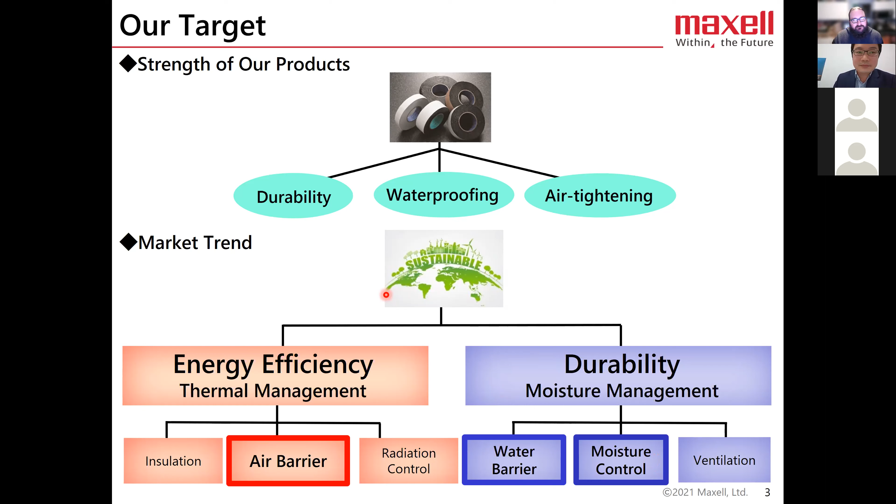I would like to talk about our products that are currently sold in the United States. Currently, we are selling exterior wall penetration pipe and wall sealer that seals the gap around the pipe penetration, and air sealing and flashing tape that seals the gap between wall fittings.

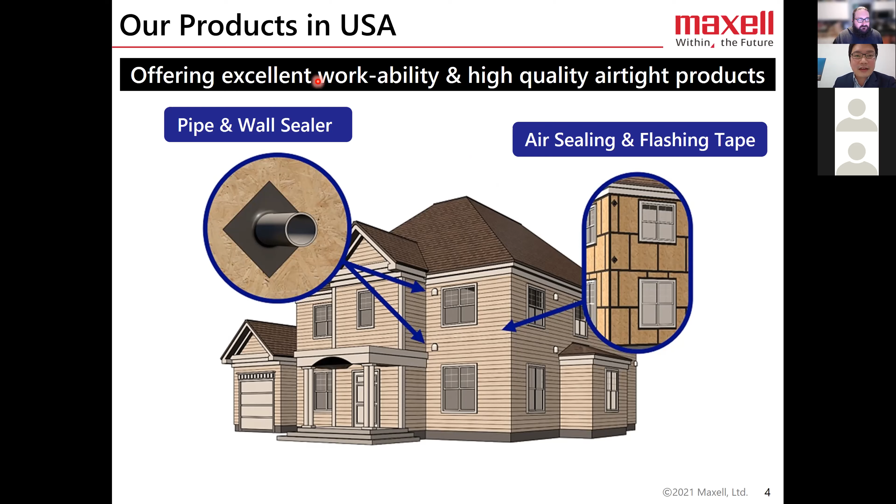As mentioned earlier, our products are high-quality tapes and self-adhesive, easy-to-use peel and stick grommets that have high air tightness, waterproofness, and high durability. In addition to these functions, another major feature of our product is excellent workability. Today, I will explain details about the pipe and wall sealer used around pipe penetrations.

Products commonly used today around pipe penetrations are spray foam, adhesive tape, and tape-on or nail-on grommets. All of these products have problems and are time-consuming work with large variation between workers on how they are installed. Therefore, we have developed a high-quality, easy-to-use product for air tightness around pipe penetrations.

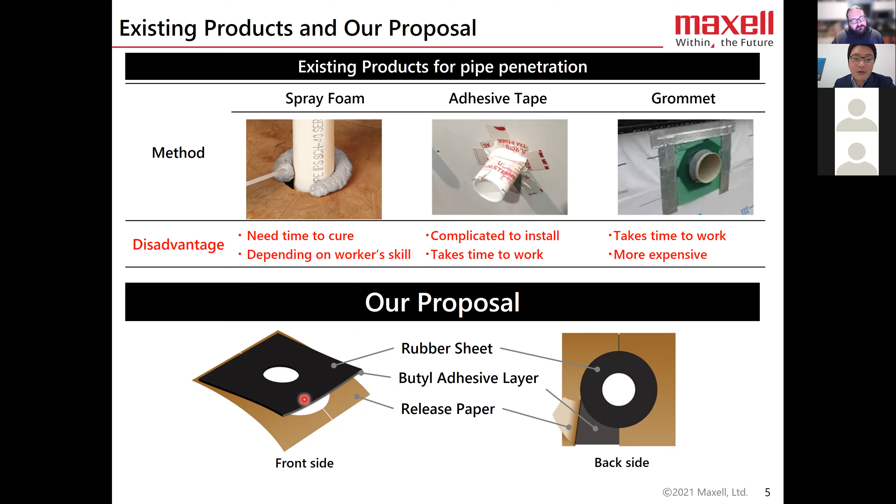The products we offer are shown at the bottom of the page, pipe and wall sealer. This is a sheet-type product in which a rubber sheet and butyl adhesive tape are integrated, and the hole is made in the center for the pipe to pass through. The construction method is very simple. Insert the grommet around the pipe all the way. Then peel off the release paper and stick it to the wall. It takes less than 30 seconds per pipe. Also, the finish is a perfect airtight seal.

The main point I'd like to make in this section is that our product helps keep labor costs down because it is a product that anyone can easily install. In addition, since there's only one way to install it, there is no construction variation between installers, so it is a product that can be used with confidence.

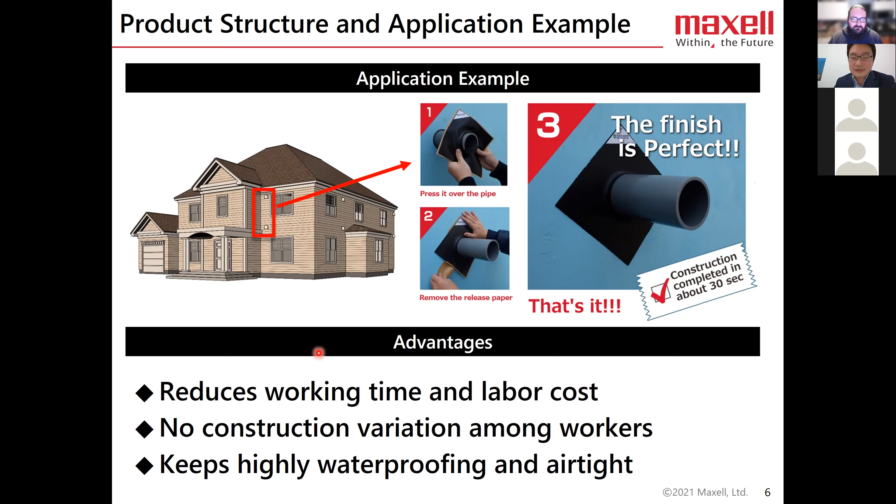Lastly, I'd like to talk about our quality. MAP system pipe and wall sealer complies with AAMA 711-13, which is required for airtight and waterproof tapes and grommets in the United States. Here we show the value of our self-adhesive strength, which is an index showing the ease of sticking to substrates. As shown here, it has a much higher value than the standard used in the United States. In addition, even after accelerated deterioration tests, the value did not decrease.

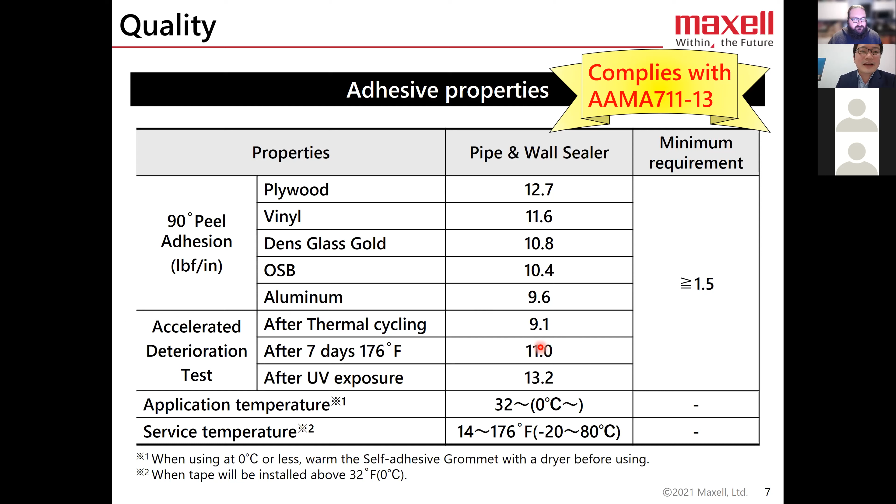From this result, it can be said that our MAP system self-adhesive pipe and wall grommet sealer and tapes are high quality and will last a long time. Before I finish, I'd like to point out the main points again. Our products are high quality, eco-friendly products for sustainable housing, have excellent workability, and will last a long time.

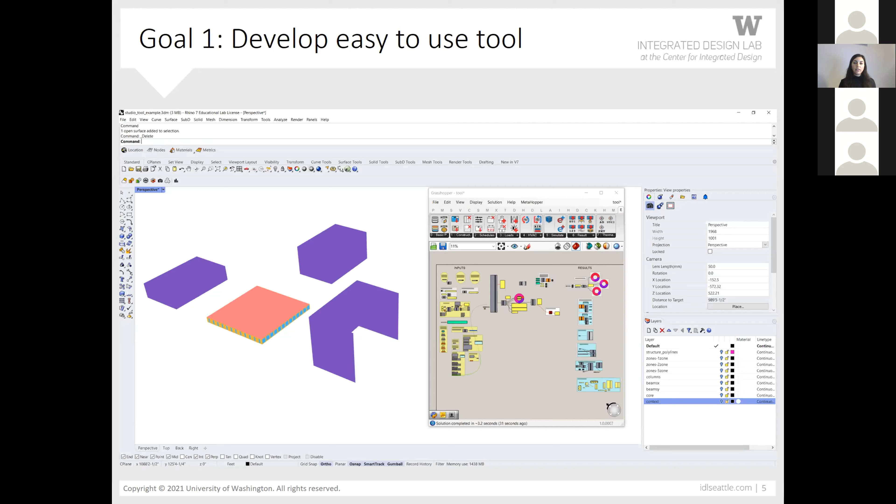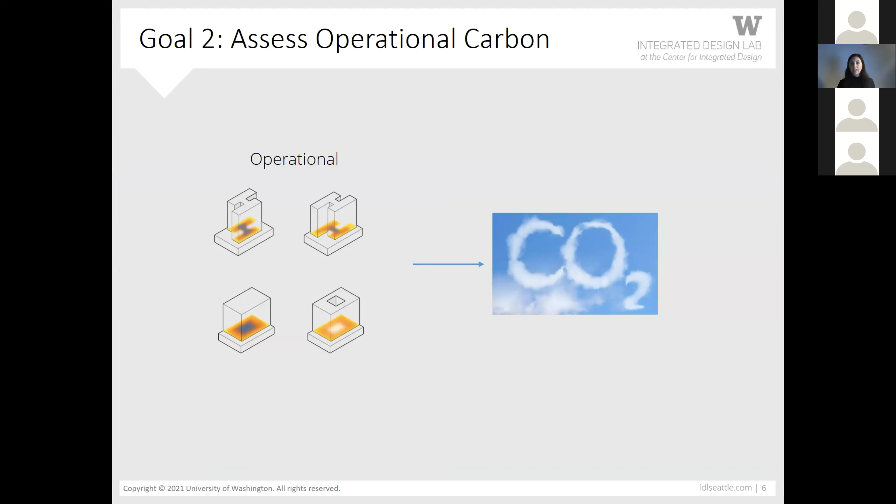So the second part of the tool was it really needed to assess operational carbon for their designs. So this is supposed to be super quick and easy for the students to use, just outlining zone geometries, put a few inputs, it packages an energy model, it runs it through EnergyPlus, and then it calculates CO2 emissions.

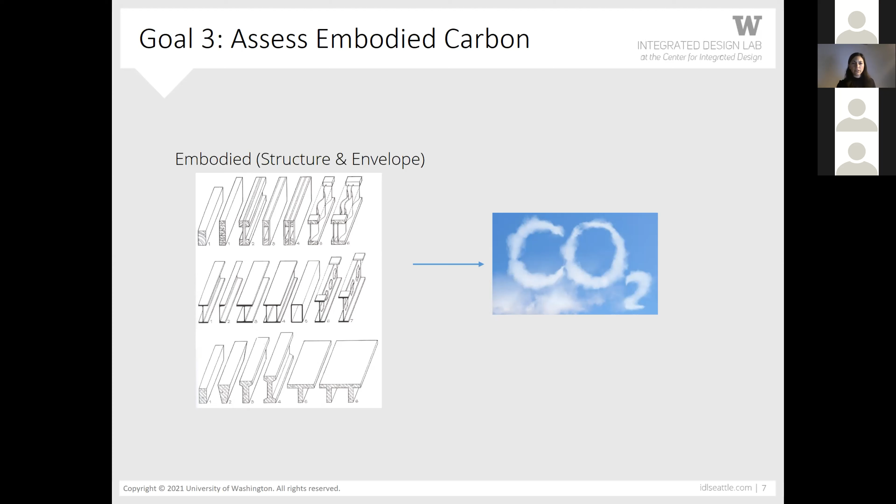And then the third goal, as I've mentioned, is assessing embodied carbon. And for the embodied carbon piece, we focused on the embodied carbon of the structure and the envelope of the design, because this is the primary contributor of embodied carbon of buildings. So we calculate the embodied carbon of the materials and calculate the CO2 emitted from the extraction of the raw materials to create the materials, the structure and the envelope, and the transportation. And I'll go into a little bit more about what measures we use for embodied carbon.

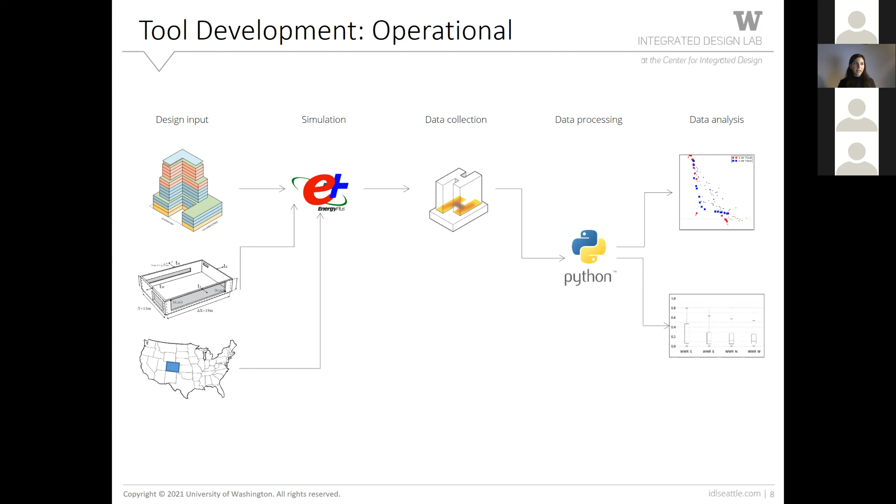So on a big scale, from the operational piece, we wanted to bring in design inputs, simple design inputs. We wanted to run an energy model through EnergyPlus. We wanted to package the results in a way that the students could easily digest and comprehend and disseminate the results. And similarly for the embodied piece, we take those same inputs, so the students don't have to give us any other inputs. It's all packaged in the same input.

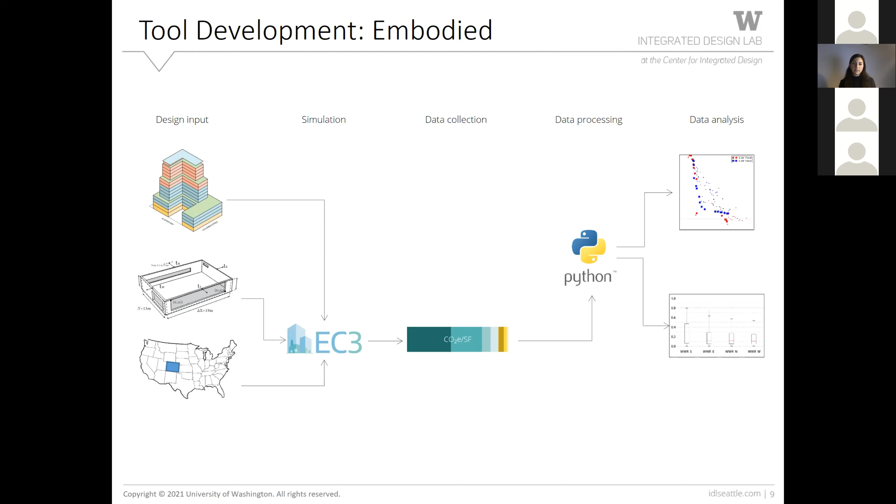And then it pulls from a database called the EC3 database. It stands for the Embodied Carbon in Construction Calculator database, which was developed by the Carbon Leadership Forum at the University of Washington, and it catalogs the embodied carbon of different materials. So we have the tool and we preset materials. We grab the materials from the EC3 database, and then we calculate the carbon emissions for that design and package the results and disseminate it to the students. So that was the goal for the whole tool.

A note about the embodied carbon data that we used, this EC3 database uses a cradle to gate methodology to calculate embodied carbon. So that means that it shares information for embodied carbon from the raw material supply, the manufacturing, and the production process of the materials. So we're basically calculating the carbon emissions associated with the production stage of the materials.

And we decided to host all of the material for this tool, all of the coding and the Rhino files, the Grasshopper files on GitHub. And this tool is accessible, it's open source, so anyone can go and download it if they're interested. So GitHub, it's basically a repository, it's similar to a Dropbox. And once students downloaded the files on their local machine, they can start to use it. And then as we updated throughout the studio itself, we discovered ways to improve the tool. So we would just push new versions to the students as they were working.

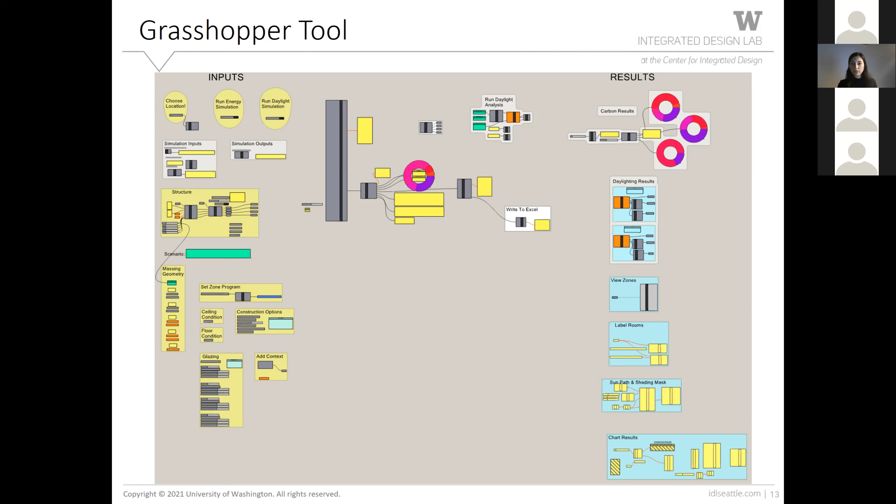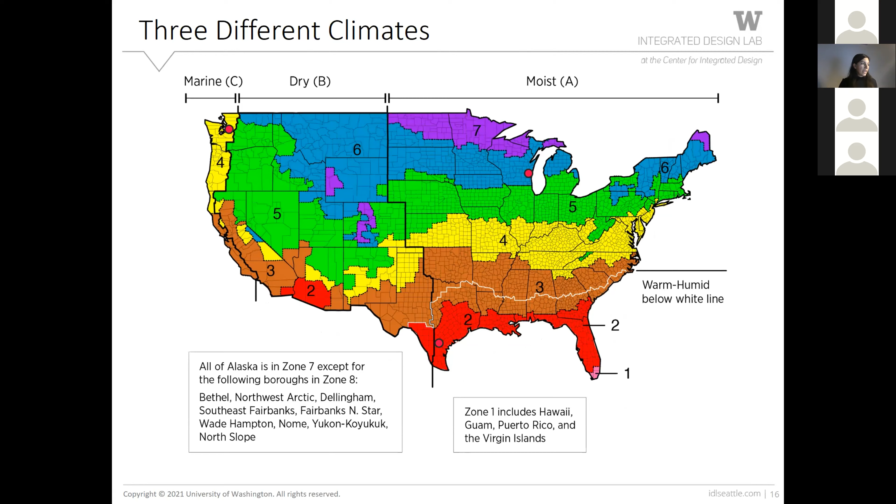So the first input that I want to talk about is the location. And the studio was set up to have 3 different studio sites, Seattle, Milwaukee, and San Antonio, in an effort to explore how climate and dirtiness of the grid impacts trade-offs between embodied carbon and operational energy. So we're looking at 3 different climates, type 4, type 6, and type 2. And we're also looking at 3 very different electric grids.

So when the tool runs the simulations, it assumes that the buildings are 100% electric. And then we converted the kilowatt hours of electricity used by the building design to grams of CO2 using the carbon intensity of the grid, and each location had a different carbon intensity. And basically carbon intensity is how much carbon the grid emits per kilowatt hour of electricity production. So Wisconsin is the dirtiest. It relies the most on coal. So that one had the most carbon emissions per kilowatt hour. Next was Texas, and Washington's pretty good because we have a lot of hydro. So the grid is cleaner.

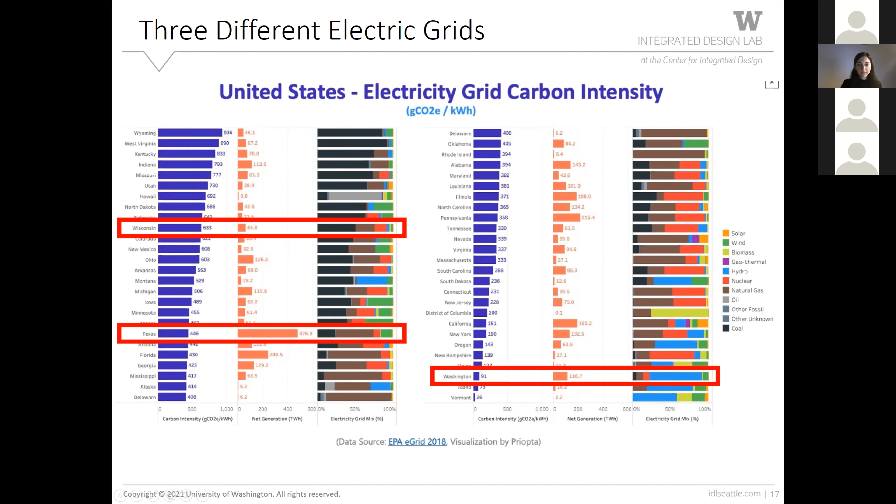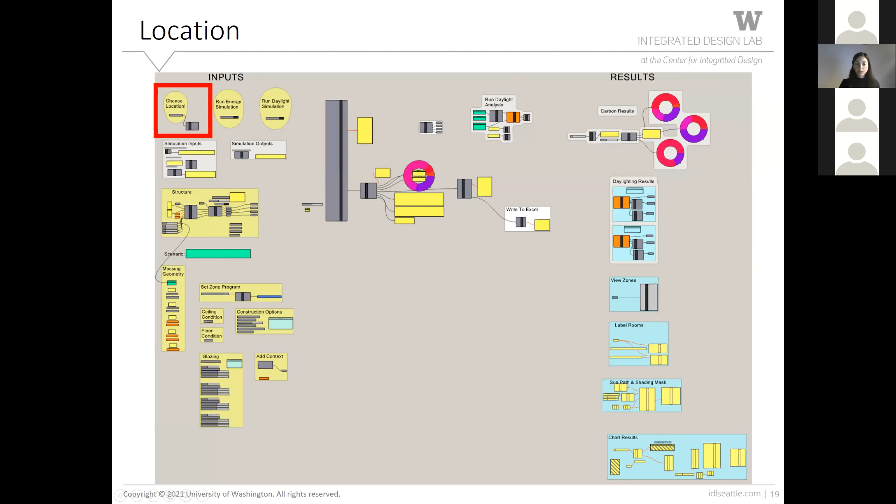So those are the 3 sites that we looked at. And the way that the students would choose the site is they go to this part of the tool in the Grasshopper script, and they simply choose a location with the dropdown. So from a user experience, they just choose this dropdown.

And then behind the scenes, we had a database of all the weather files, the TMY3 weather files that went to the energy model. We had the carbon intensity of the grid, and then we also had embodied carbon information for materials that was specific to a location. So the embodied carbon represents the manufacturing process that the materials are most likely to come from.

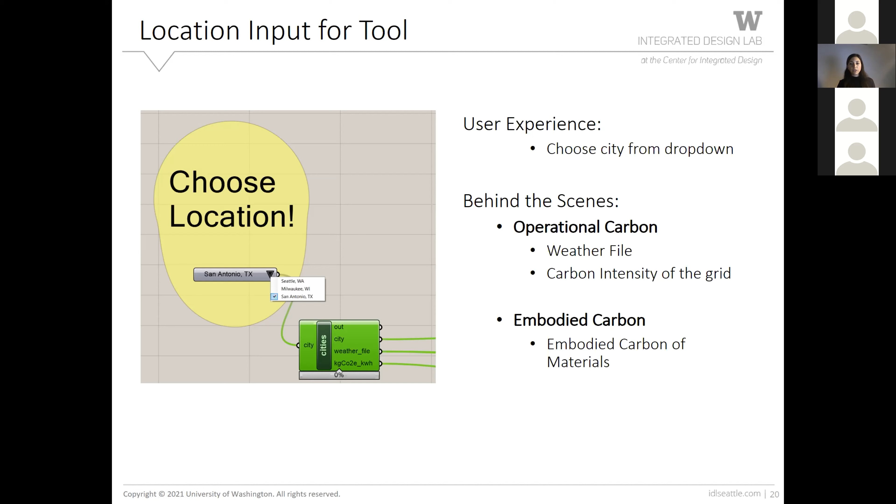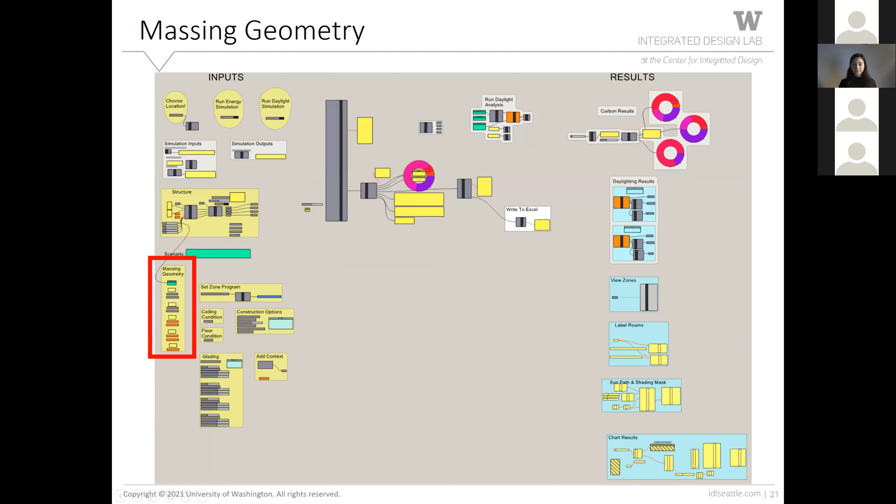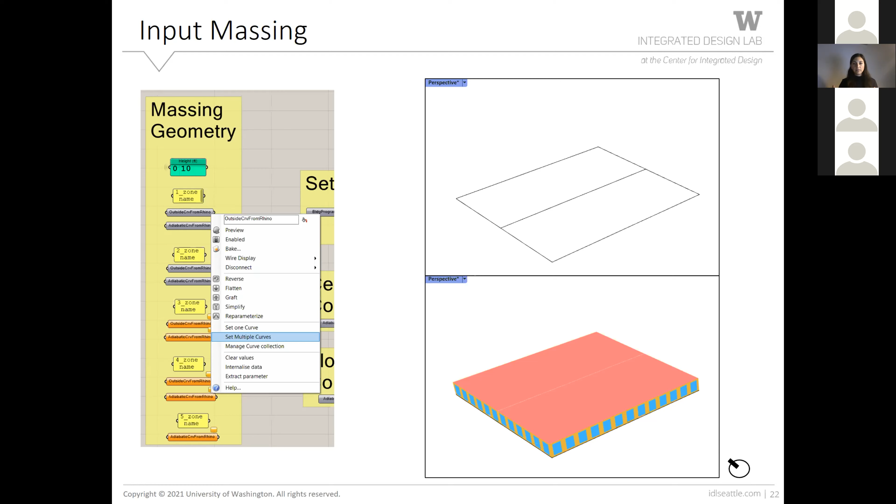One important thing to note is that this methodology that we created only gives embodied carbon and operational carbon information for 1 level. So if the levels were the same, they could just copy the information. If they change, then they would have to recalculate embodied and operational carbon for the design as it moves up and down the building.

So from a user experience to input the massing, they just choose the Rhino geometry. And that was really the only thing we used Rhino for. And then behind the scenes, it creates the energy model, and it also creates the area calculations for the facade and the slab.

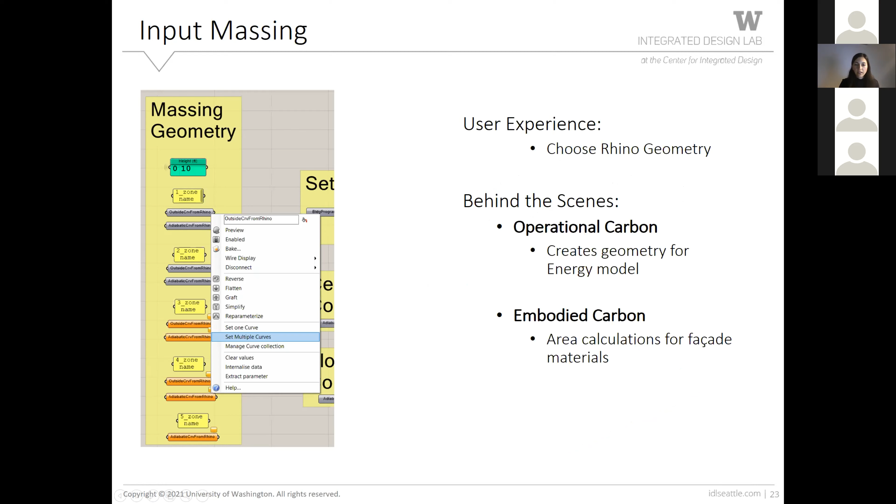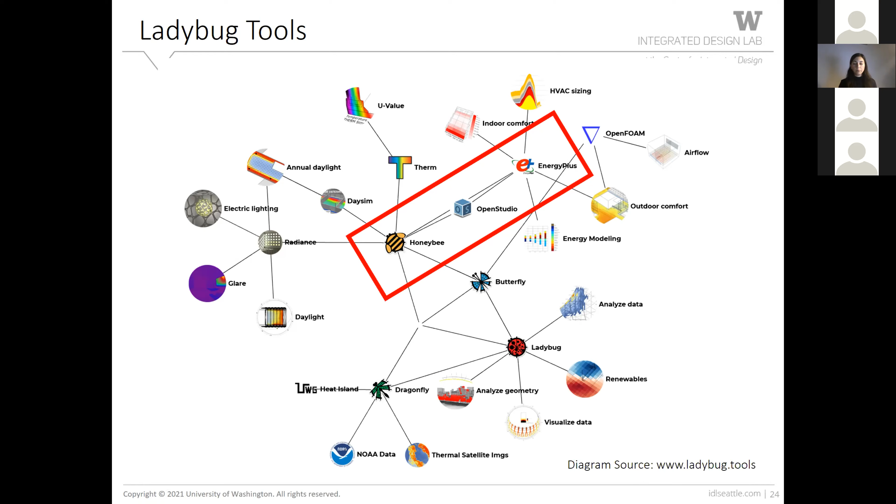And just to mention again, we used Ladybug tools to package the energy model. Those are those components, the open source components for Grasshopper. It created an OpenStudio model that was then run through EnergyPlus. And it was really important for us to use these tools because they are validated. EnergyPlus is created by the Department of Energy, and they're open source. So we just wanted it to be as accessible as possible, thinking about how people, maybe architects, could use it in the future.

Oh, there's a question, is a zone a room? It could be a room. It could be spaces that maybe have different programs, different heating and cooling requirements, or that are separated. And then I think the most important thing for the studio was that by separating the space, the entire floor plate basically, because we're basically modeling floor plates.

Separating the floor plates into zones allowed you to understand what the heating and cooling loads were doing throughout the day, because they would be different based on orientation, for instance. So it allowed you to kind of fine tune and understand what facade impacts were having on different areas of the floor plate.

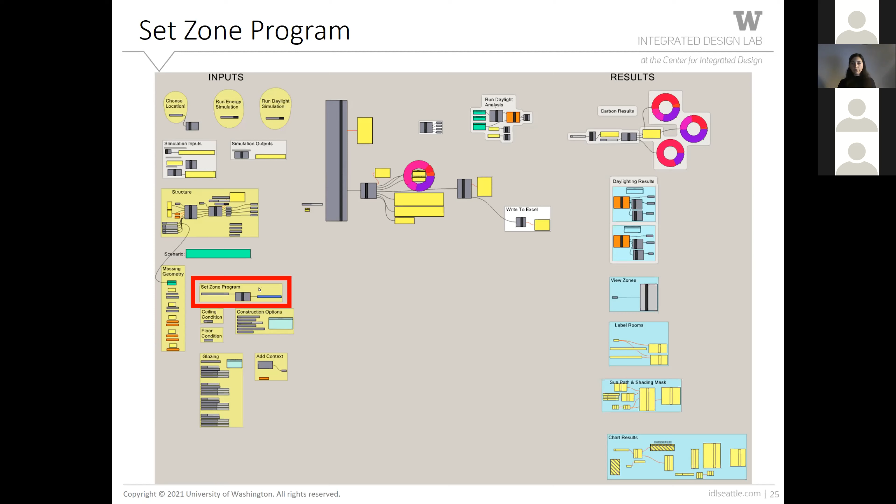Yeah, so we had 3 different zone program types, and we allowed the students to put in the 3 program types: retail, office, and residential. So the intent of the studio project was to create a mixed program building. And the way the students would input the zone program is from a drop-down menu.

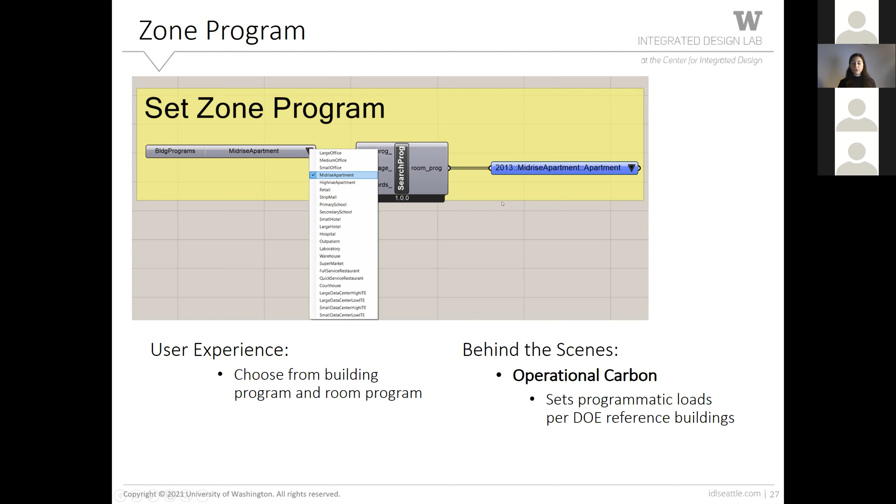These were Honeybee components that come from Ladybug Tools, the open source scripts that we were using. And the beauty of using those is that they pull programmatic loads from the Department of Energy reference buildings. So we didn't have to set things like the amount of people in the space and the schedule and the lighting and the electrical equipment. All of these things were referenced from Department of Energy reference buildings using this Honeybee script.

So in terms of all of these types of assumptions, the students did not have access to change any of this. They didn't have access to change the infiltration rate, for instance, which would have a huge impact on operational energy, how tight the building envelope is. So there definitely were a lot of limitations, but we just wanted to give them a quick way to assess basically building massing, window to wall ratio, and building envelope wall assemblies. That's the thing that the tool really focuses on.

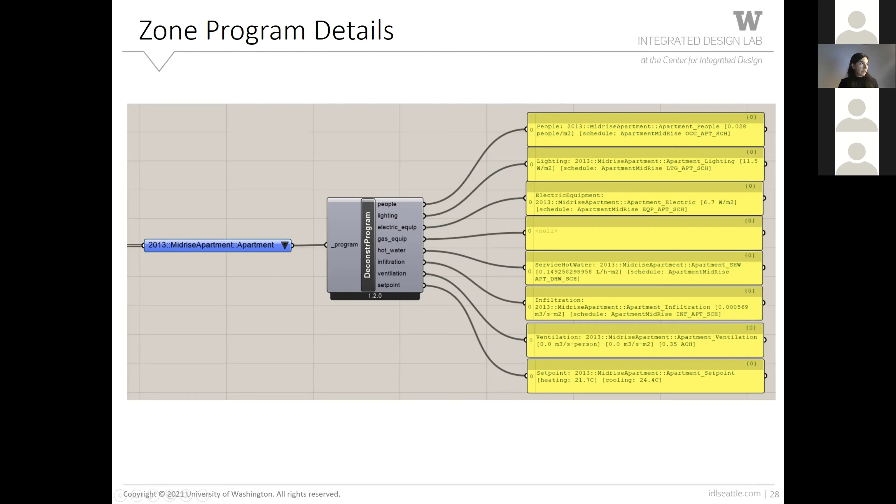So that's how the students would choose the program type. And then we also allowed for inputs on the ceiling and floor condition. Since they are just modeling floor plates, they could tell the tool if the ceiling was outdoors or adiabatic. Adiabatic meaning that there's no heat transfer between inside the zone and outside, so meaning that it's up against interior space.

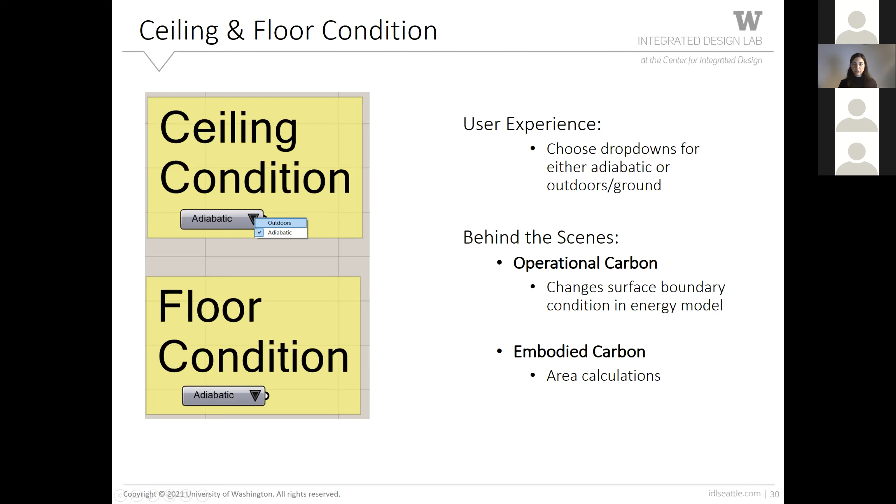And then the floor condition could be adiabatic or ground. And then this would change the energy model and change the embodied carbon calculations. And then we have the wall construction options. So we allowed the students to choose from different facade cladding types to assess the embodied and operational pros and cons of that decision.

The exterior insulation type and thickness, the interior insulation type, the wall framing, and interior finish. So once again, this would change the wall construction of the energy model, and then it would also pull from a database that we created and calculate embodied carbon calculations.

And at the beginning of the studio, the students were limited to these decisions, but as the studio progressed, we did change the tool for some students who really wanted to look at the impacts of specific materials. So we added materials to our database and allowed them to customize it a little bit.

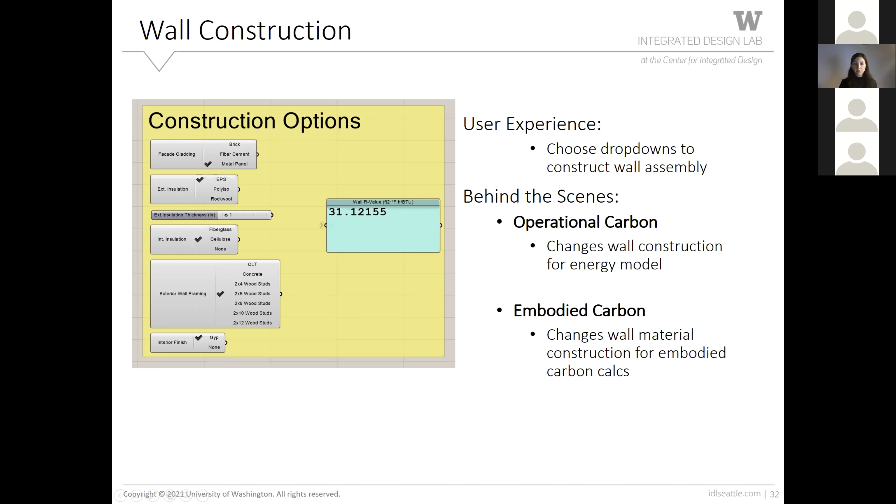And we also allowed the students to change glazing parameters. And those parameters were the frame type, aluminum or wood, and double or triple glazing. The window to wall ratios of each facade, north, south, east, and west. And if the building footprint had more than one facade facing in each direction, that window to wall ratio would be applied to multiple facades.

So if you had like an L-shaped building with 2 facades facing south, the south window to wall ratio would be applied to both south facades. You could choose between low or high solar heat gain coefficient and also different shading depths. And all of this went into the operational carbon energy model and also into the embodied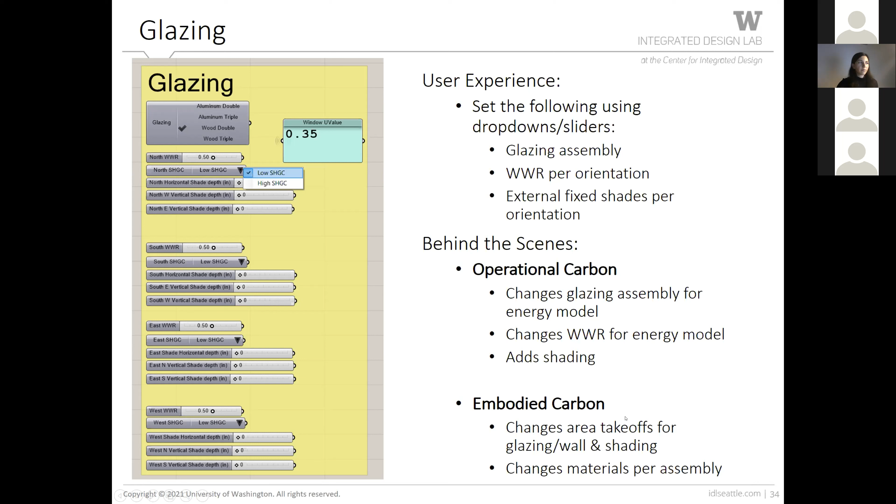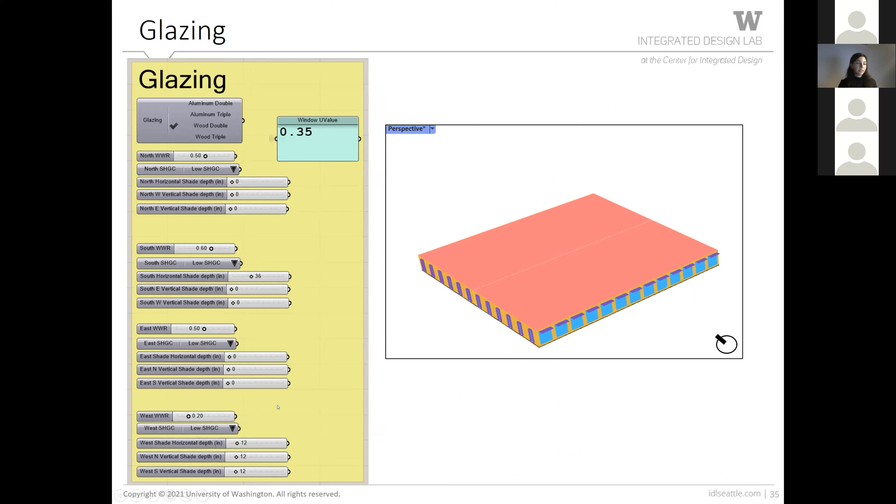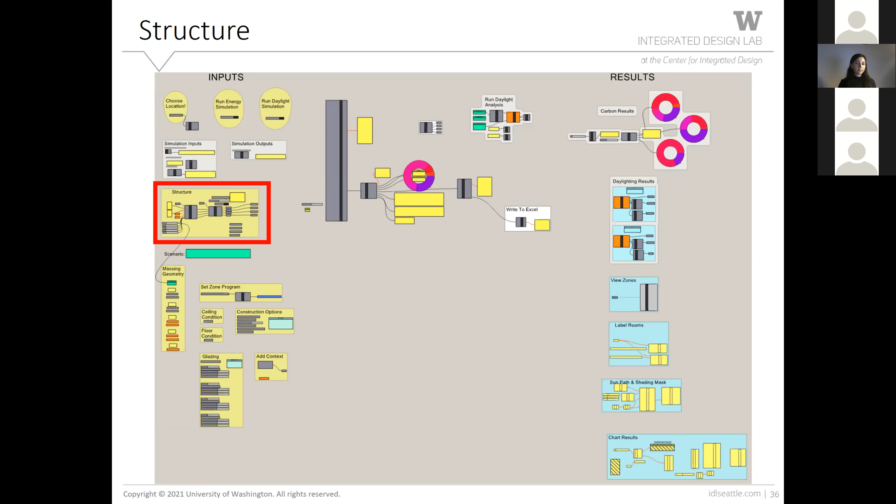And lastly, we also allowed the students to calculate the embodied carbon of the structure. And the students had two different ways to input the structure. They could either draw out this structural grid, and we were assuming that this was all mass timber, a CLT building. So they could draw out the columns and the beams in Rhino and a core, and they could bring that geometry into the Grasshopper script. And this was only used for the embodied carbon calculations.

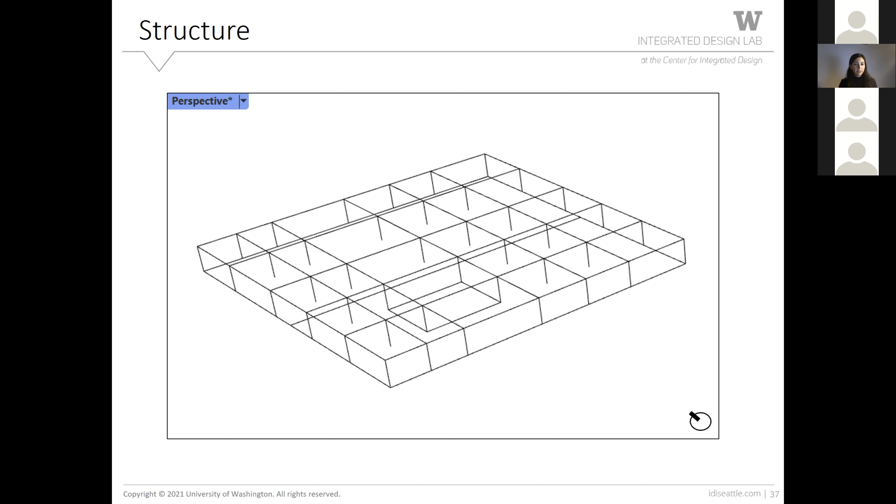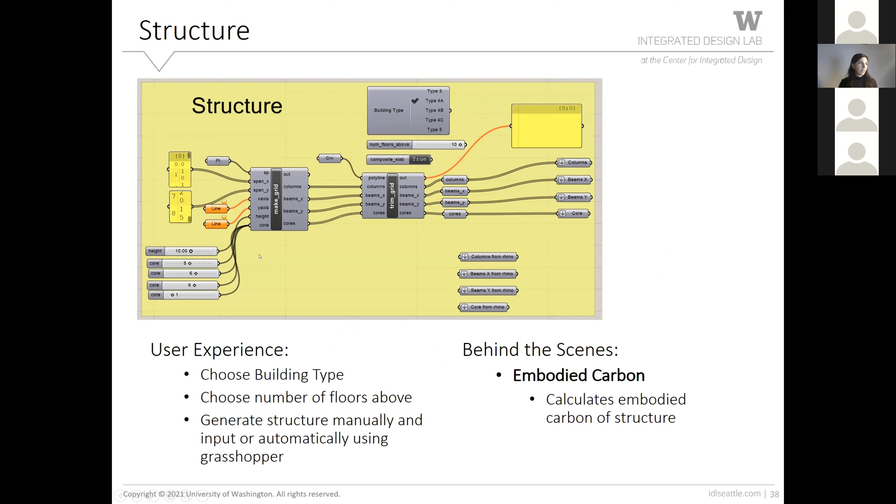Or they could manually tell the script what they wanted their bay spacing to be and what bay they wanted their core to be in, and it would create a manual or an automatic structure for them. And this was used for the embodied carbon calculations.

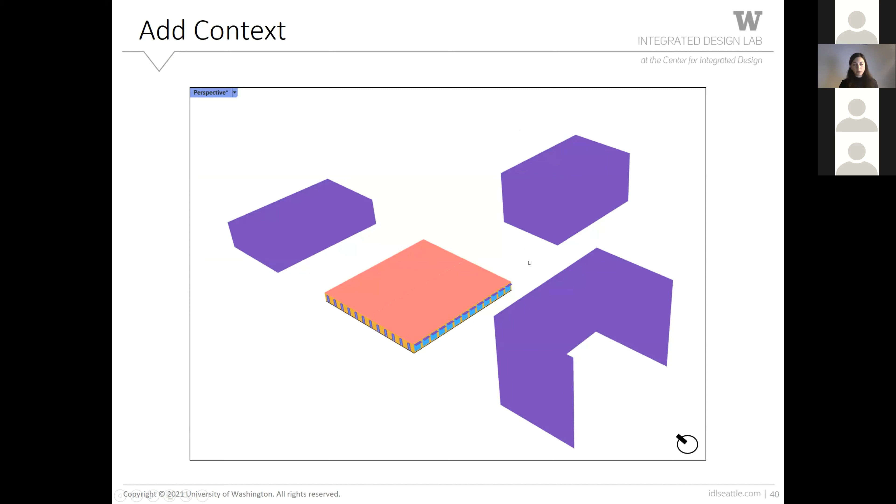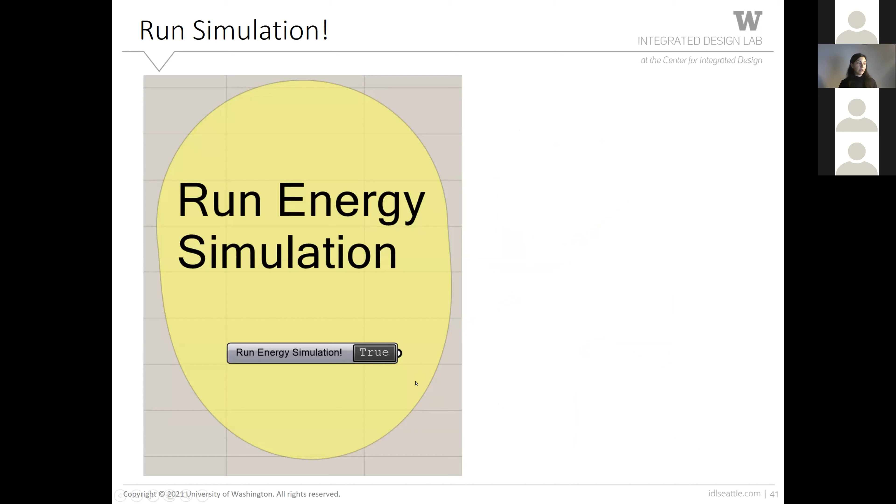So once the students input all of those inputs into Grasshopper, there's a part of the script where there's a toggle, and they just had to click it to true. And then the energy calculation would start running. That was a good sign that everything was working well. And then the energy calculation took about 20 seconds. It's super fast. And then they would start to get some outputs.

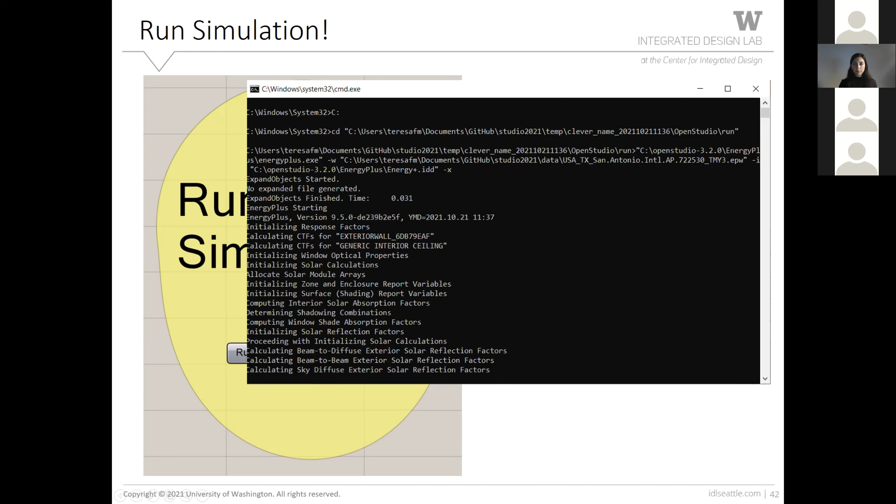One of the outputs that we generated were Excel spreadsheets. And with each iteration that they ran, they would have a separate Excel spreadsheet, and it was given a name. It was the date and time that they ran the calculation, so they could keep track. And they could also name the iteration, so they could also understand what iteration they were looking at.

And then it had a lot of information. It gave you the inputs, the height, the wall assembly R value, the U value, all of the glazing parameters that the students chose. And then it also had the embodied carbon calculations, the total floor area of the different zones, and then the facade areas of the different zones.

And then it gave the EUI, the kBTUs per square foot per year for the different energy uses. So we had cooling, heating, lighting, equipment, hot water. One thing to note is that we ran ideal air load calculations. So these values don't have a COP associated with them.

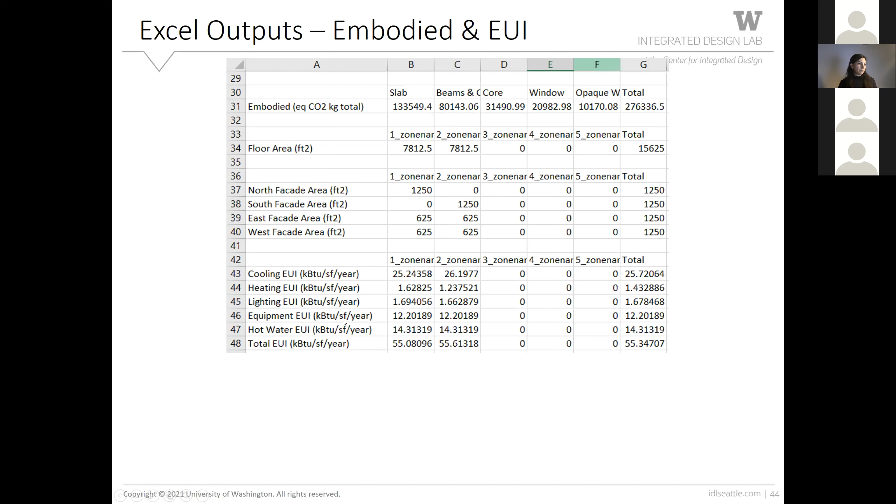And then from that, we calculated total kBTUs per year, converted that into kilowatt hours, and then used the carbon intensity of the grid, the relationship between kilowatt hours and CO2 emissions based on how dirty the grid is. We used that to calculate total kilograms of CO2.

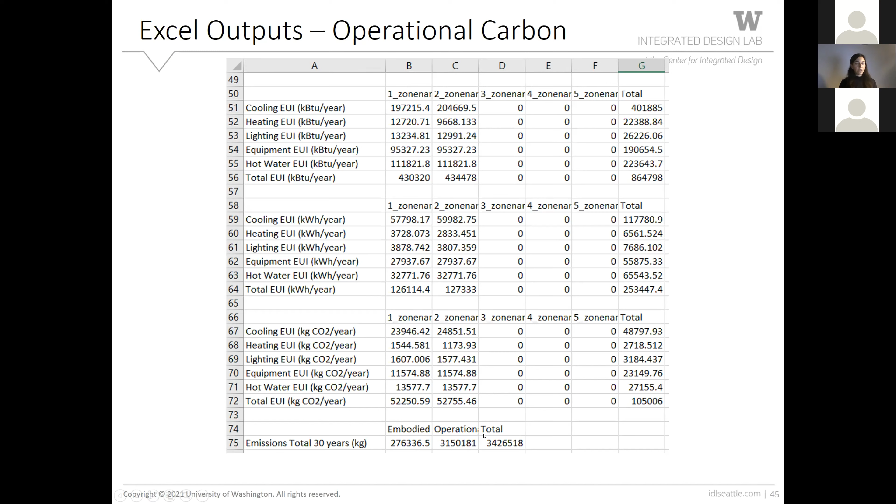And then we also told them their embodied CO2. And then this value shows the kilograms of CO2 per year. We also calculated it for 30 years to show, like, over a 30-year life cycle, how the two values compare. And that was what they had in their Excel spreadsheets. And then they also had these Grasshopper pie charts that were generated.

After each simulation, they could quickly visualize, for the embodied carbon piece, how much is the slab contributing? How much is the window, the beams and columns, core, and opaque wall? And then for the operational piece, how much the cooling equipment, heating, hot water, and lighting. This little piece is lighting. It's so small that the label isn't there. How much that was all contributing to the total operational energy and carbon.

And then there was a comparison between embodied and operational carbon. And they had a slider and they could put it out to 30 years to kind of get a sense of the relative impact of both.

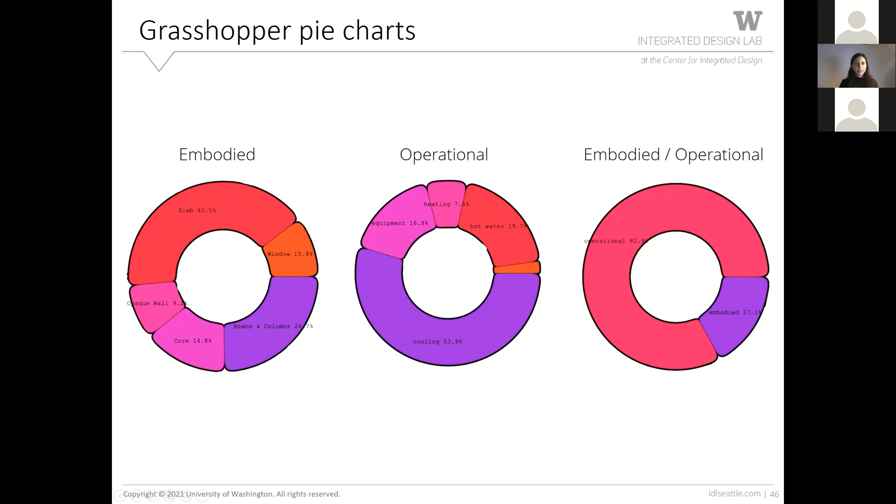Other things that the tool allowed them to do was they could generate sun path diagrams to understand shading opportunities, especially in San Antonio. This was something that the students took advantage of. And it basically would show the sun paths throughout the entire year. This is showing on a typical day in June, if you're standing at this facade, looking up where the sun

would be coming from. So you could see that the ceiling covers, at least from this vantage point, a lot of the sun. And then this building blocks a little bit of the sun in December. So you're gonna have sun coming in to that vantage point during this time of year. And this was helpful information for some of the students.

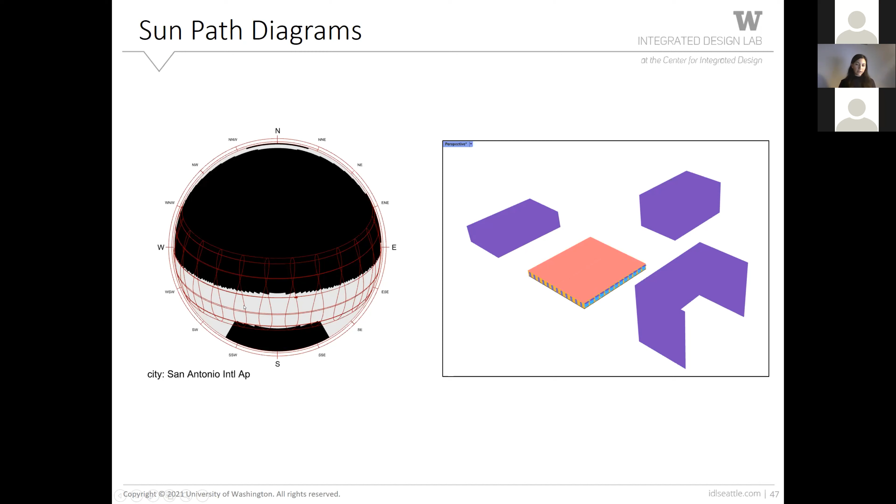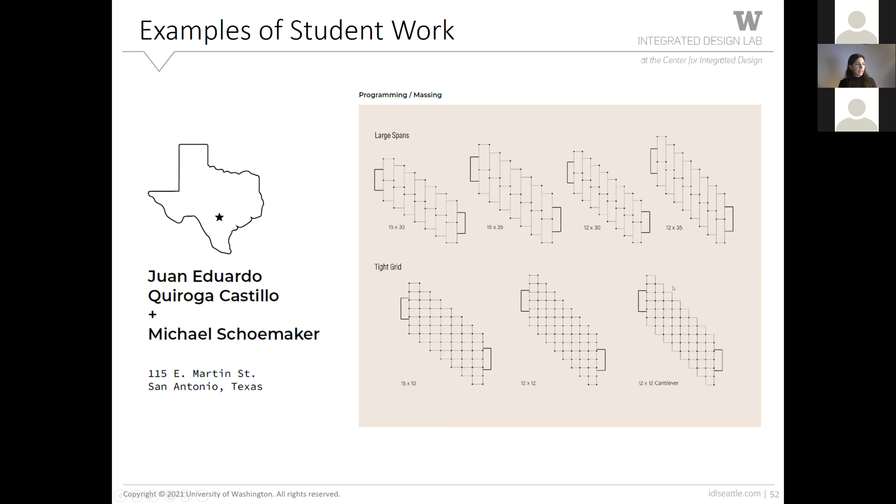They were also playing with shading. So they were investigating how much shade depth is optimal, and how much shade depth would optimize operational and embodied together. And this shows the progression of their design, creating these bays and then shifting them and adding shading by creating those balconies. And that led to a huge reduction in energy, a 10% reduction in EUI, and they determined that through the tool.

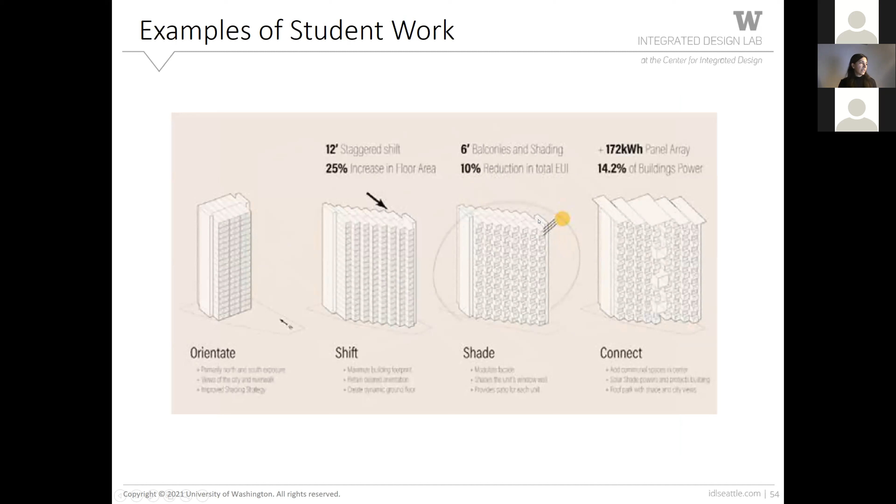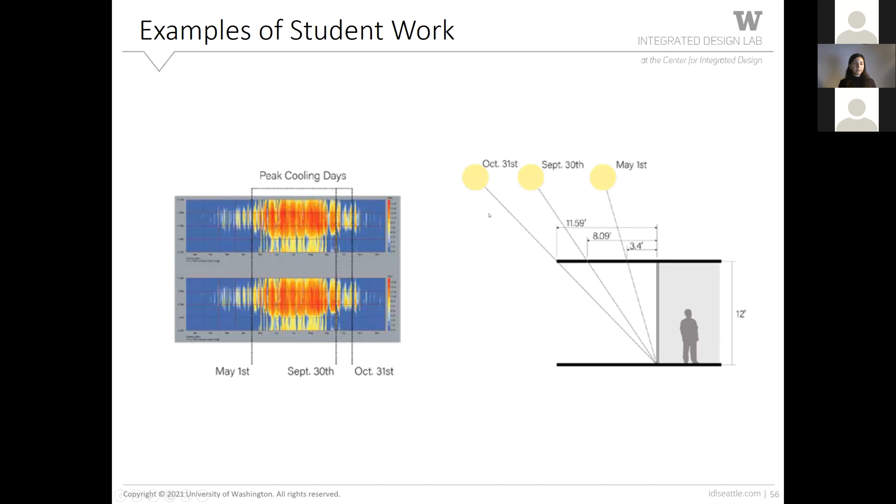They also did an in-depth analysis of exterior shading. So they looked at when are the peak cooling days, and then tried to determine what would be the optimal length, as a starting point, for the balconies that would shade during the hottest days where you would need the most cooling. And then using that as a starting point, they ran a whole bunch of simulations plotting the embodied versus operational carbon of all of those design variables that I just listed. And I think their optimal result was a 12 by 12 grid with an 80% window to wall ratio with a cantilever.

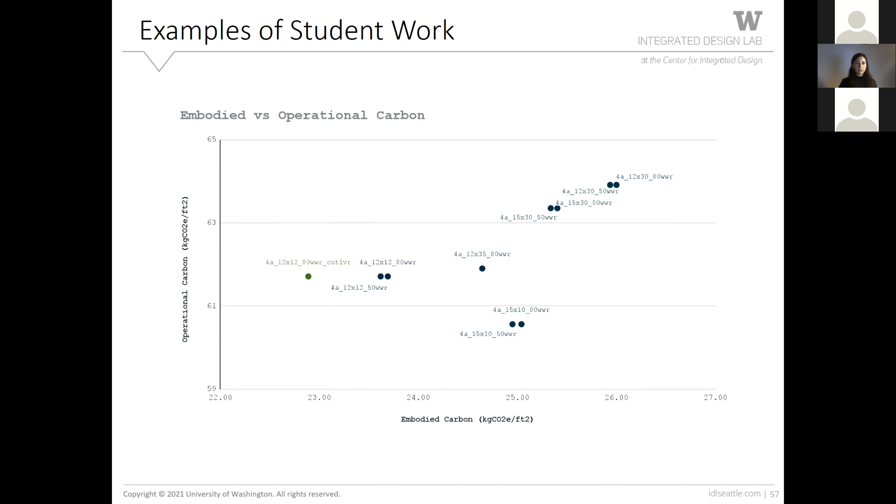And of course, they were also considering a lot of other variables. They were designing a building. This is a very pixelated image, but the embodied carbon and operational carbon explorations were used as a guide to help them make decisions, but it wasn't the only thing that they used. They had to think about the site, how the spaces were designed, a whole bunch of things. And I think that was one thing that was sometimes challenging for the students, how to use all of the information that the tool was generating to make decisions. And I think this team did a really good job because they started with some assumptions about their design and used the tool to ask questions, to tweak it and optimize it.

So I just wanted to touch briefly on some research we have been doing that has been expanding this tool development for the studio. It's a paper that we're working on, Tomas, Chris and I, and it's called On the Trade-offs Between Embodied and Operational Carbon in Building Envelope Design: The Impact of Local Climates, Energy Grids, and Supply Chains. And basically we're using the studio tool.

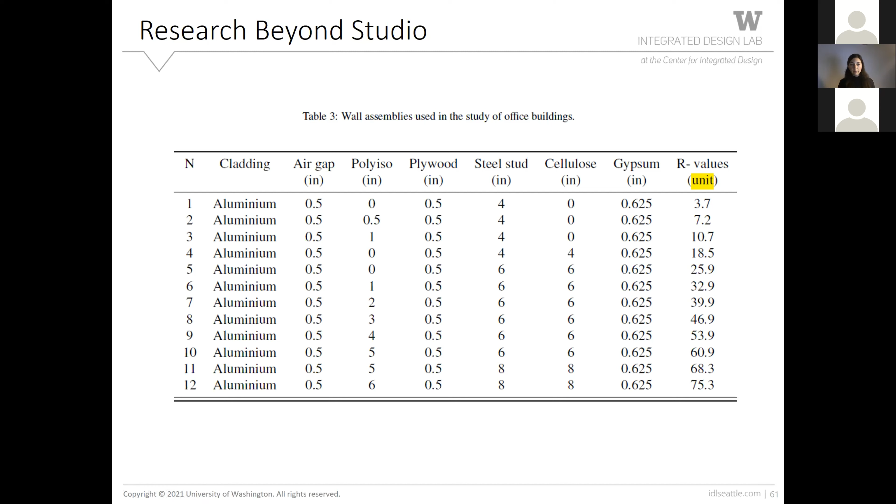Just to give you an idea of what type of things we're looking at, these are the 12 different assemblies that we looked at. We varied the thickness, the exterior insulation thickness, and then the amount of interior insulation to get different R values to understand the relationship between changing the wall type on operational carbon and embodied carbon.

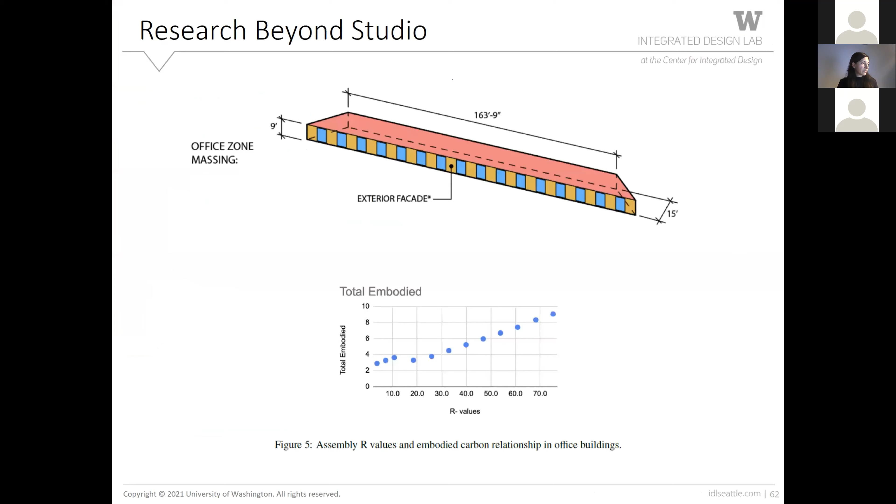And then it would also be a matter of adding information for the embodied carbon in our database for that particular location. So it isn't too hard. We included some additional cities in this paper, and it didn't take too long to add.

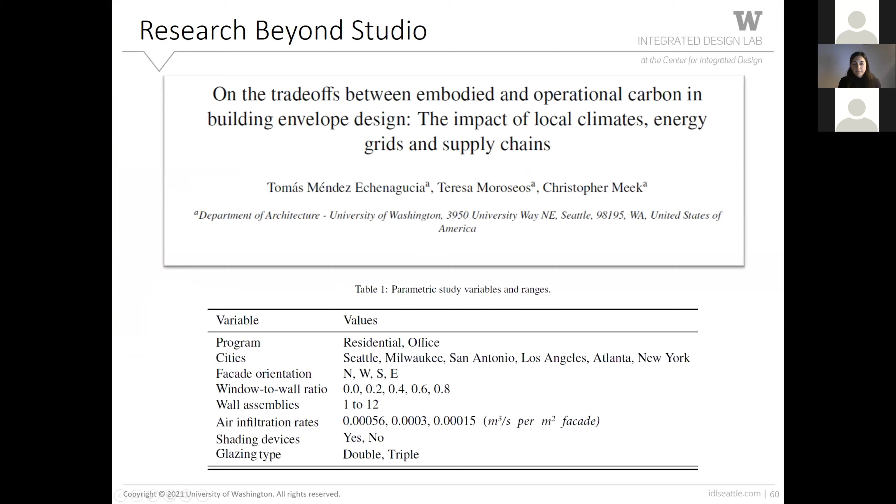So the tool is kind of constrained by the studio environment because you had specific cities and kind of specific uses. So there are kind of pieces to be added to add a school use or something else like that. Yeah, it was really constrained, and we spent a lot of time. One of the reasons it was so constrained is we wanted to gather the design results, the operational and embodied results, for all of the students.

And in order to do that, we kind of had to constrain the inputs to make sure that the outputs were all consistent. We did allow the students later on to be able to customize their Grasshopper tools, and we worked independently with them to do that. But yeah, just because we were trying to make it as applicable to everyone, I think it did limit the capabilities of the tool itself.

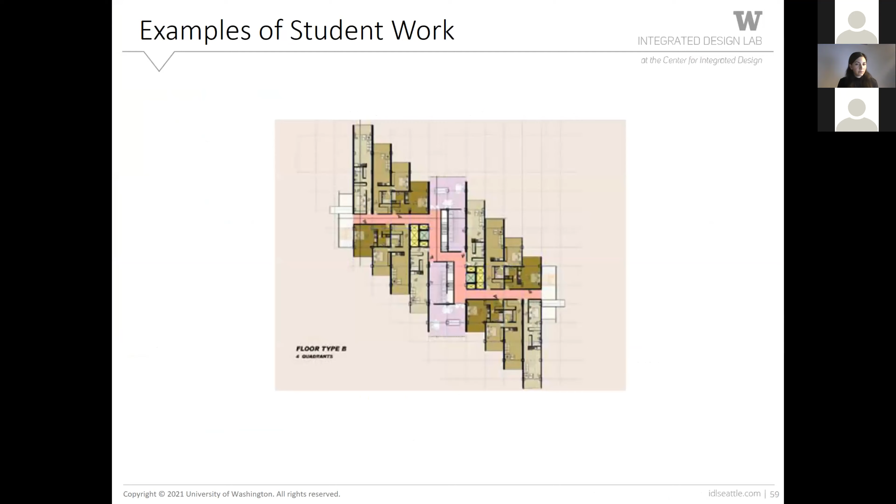I think because of the mild climate, the embodied investment just didn't have to be that much. Like you didn't need as much insulation, or you didn't need exterior shading as much as some of the other cities needed. So I think the students found that, and when they reported these to us, they probably had already discovered that they could scale back a little bit. But in places like San Antonio and Milwaukee, they needed a bigger investment in embodied carbon because of the climate, I think.

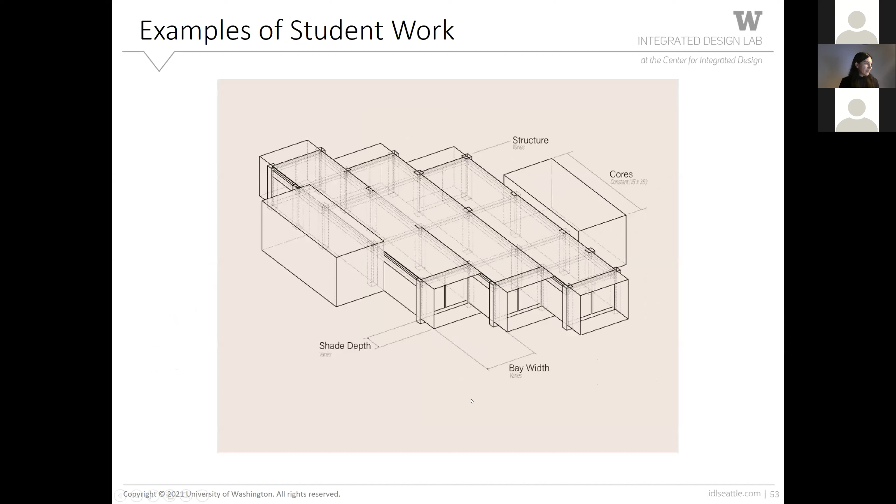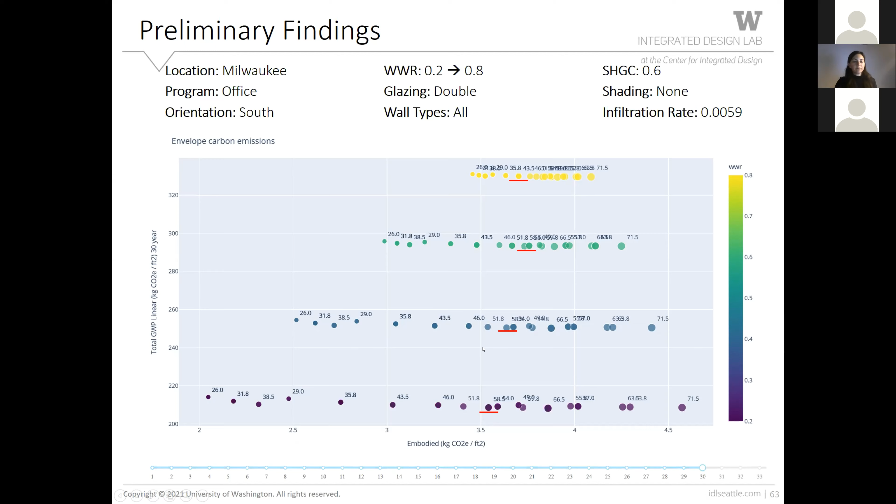Because you'd sort of expect to see a line going down from right to left, right? Or am I misinterpreting that? Oh, like you would expect to see something like this. Yeah, that's a really good point. I think what this is showing, and I think our other results are showing this too, like these results are showing it too, that the relative impact of embodied carbon seems to not be making as much of a difference on operational.

But one thing, if we zoomed in here, we might be seeing a little bit of a trend. It doesn't really seem like it though. I think that's a really good point. I need to look into that more. Yeah. I assume it wasn't a large sample, right? I mean, yeah, it's not a large sample. That's a good point. And I guess this data is kind of hard to interpret because

one thing that's not staying consistent is the massing. So it's kind of hard, honestly, to compare all of the studio projects together because there are so many variables that are changing. If we just looked at one particular group, we might be seeing that trend where as you increase embodied, operational decreases. But yeah, I think that's a really good point. I think that's something that we should dive into.

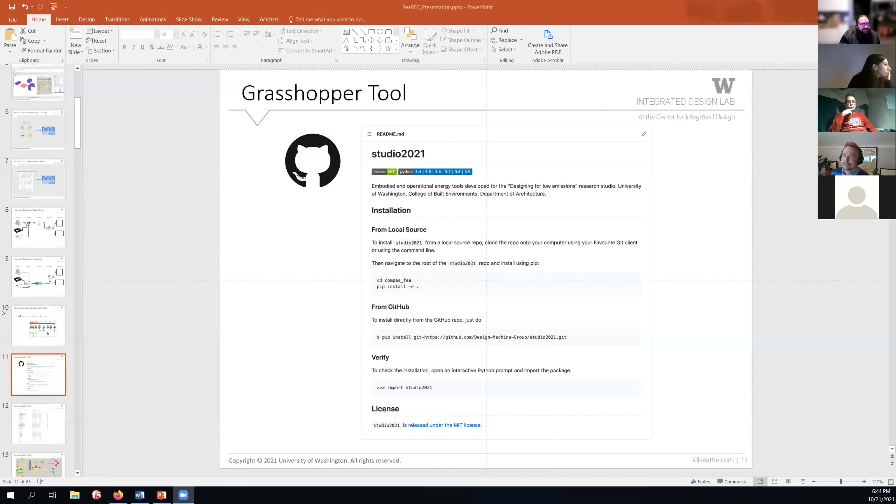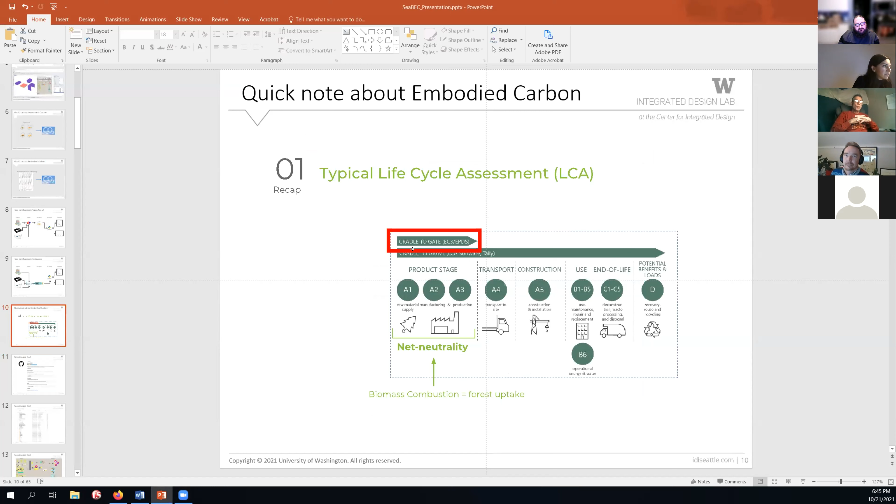So the cradle. This is something I'm still learning about. In the development of this tool, I was focused on the operational piece, and Tomas, one of the studio professors, was in charge of doing all the embodied carbon work, and he's thought a lot more about this than I have. But I think this summarizes the cradle to gate and cradle to grave calculations pretty well.

So cradle to gate is only the production stage. It doesn't take into account transportation, construction, actually assembling the materials, and then the end of use. And the reason we chose cradle to gate and the EC3 database is just because of the breadth of information that's in that database. Sure. I think the cradle to grave information, from my understanding, I might be wrong, just doesn't have as much information as the EC3 tool, which focuses on cradle to gate. Yeah, it's a whole other level of complexity. Yeah, there's a lot of complexity.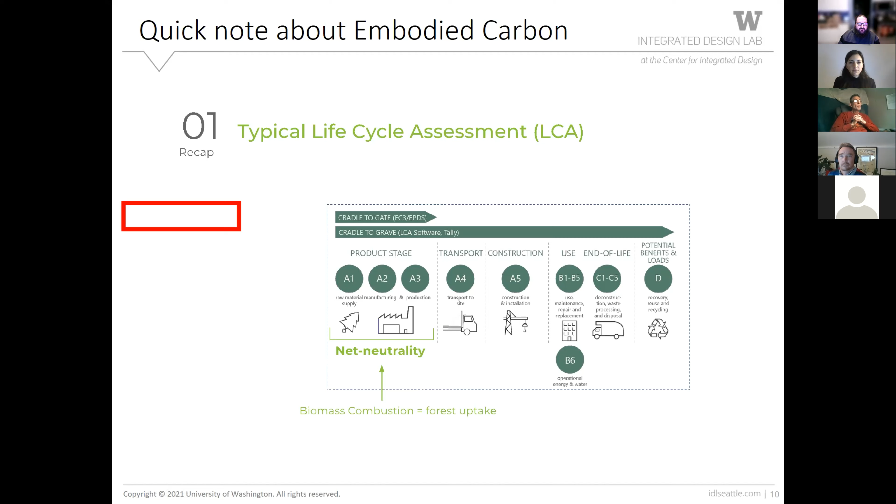Cool. I was just pulling up the web tool that I was talking about, that Tomas is building, and it contains all of our data for the simulations we ran for that paper, 10,000 simulations. Right now you can filter by all of these different parameters, and then you can plot Pareto charts of different variables. So you can look at heating EUI versus embodied carbon, for instance. This is looking at Seattle.

So yeah, it's cool. And we're going to make this public. We're going to publish the link for it in the paper. I can send you a link to the paper once it's published. That'd be great. Thank you.

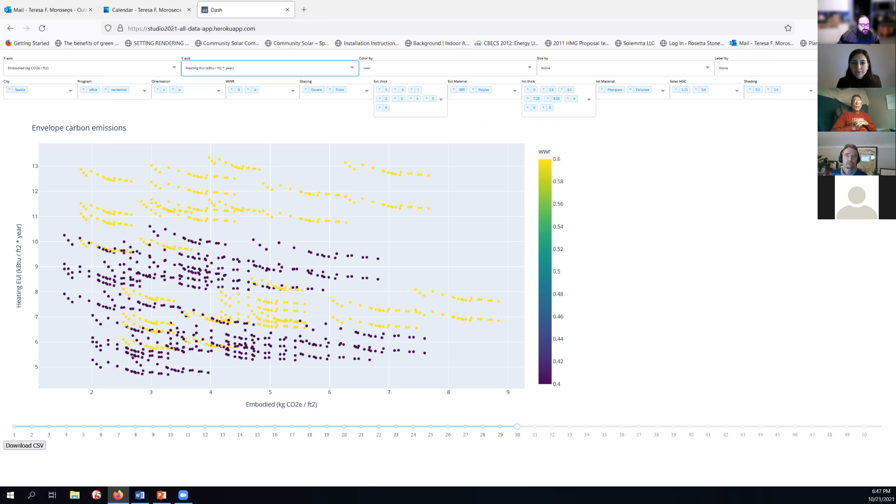How else are you spreading this knowledge? We are engaged with architecture firms in Seattle, and we've been sharing the information we learned and the tool with them. There's an advisory board. There are 13 architectural offices that are part of the IDL advisory board, and we presented the studio tool development to them, so that's one way we've been sharing the information. And other than that, this paper that we're writing and the tool itself is open source, so as more people learn about it, it'll just grow if there's interest.

Cool. Moran had a couple of other questions. Do you include EPDs in the database, the environmental product declarations? No. The database basically has, for each material, the energy properties that we need for the energy model. And then it has the carbon emissions associated with it from the EC3 database.

That's all it has. And he also asked, have you looked into any structural materials such as concrete or steel for their impact? I guess that's kind of outside of the scope. Yeah, I think that's something we should definitely look at, but we haven't gotten there yet.